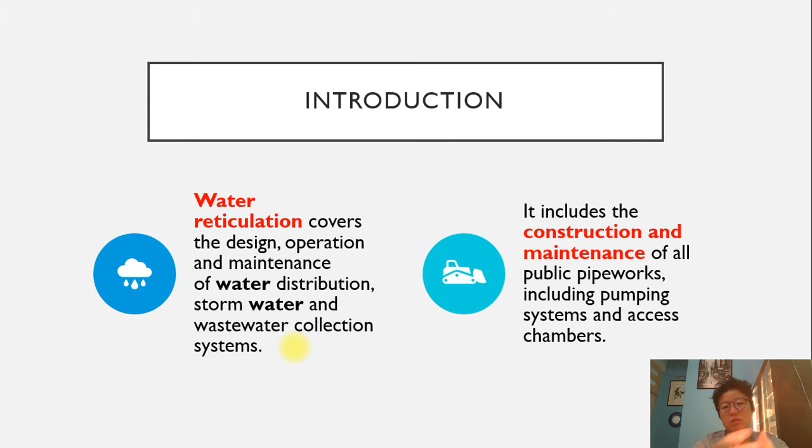Okay, for introduction, you can see here that when we talk about water reticulation, we talk about the design, operation and maintenance of water distribution, stormwater and wastewater collection system. So it's a big system. However, in this chapter, we are going to focus just on raw water coming in from the river, going through the treatment, and then going out, being distributed to all the users, end users like you, me, the industries and all.

Alright, and water reticulation works will include the construction and maintenance of all the public pipeworks, pumping systems and access chambers. Right? So hopefully after today's lecture we'll come to see water reticulation more clearly, and when we start seeing some pipes or what we call menara air around in our housing area, we'll be more aware of what they do and why they are being placed there. Okay,

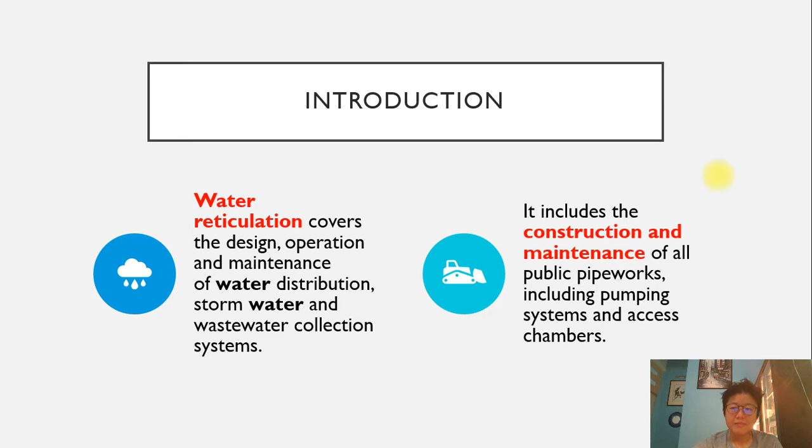as an overview of who are the people taking care of our water supplies, right? What we call the Malaysia Water Authority. It is under KeTTHA actually, Kementerian Tenaga, Teknologi Hijau dan Air, and under this ministry we have what we call SPAN. That's Suruhanjaya Perkhidmatan Air Negara. You must have come across this term before. Okay, and before we go any further from there, let's look at the left hand side of this

flowchart. You can see that there's a Ministry of Finance. All ministries work the same, even for the Ministry of Higher Education, Ministry of Education, Ministry of Transportation. The Ministry of Finance is always on the side providing the funds for running all the operations. Coming down from Ministry of Finance, we have Pengurusan Aset Air Berhad to oversee all the other water authorities in different states in the country.

Okay, now let's go through again. And we have WSIA 2006. This is a body that's been set up, I can read in the legend down here, to provide the legal framework required for the regulation of water and sewerage services industry. Okay, and coming down there, we have SPAN's representatives that oversee the water supply services and sewerage services. So sewage is obviously under IWK. We won't be looking at this. I believe you've already seen this in your earlier chapters.

So for the water supplies, you'll be familiar with these companies. I'm sure if you are from Johor, we know it's SAJ. If you're Malacca, you call SAMB. Negeri Sembilan is called SAINS, and so on and so forth. Right? And Selangor obviously is SYABAS. Sometimes a bit contradictory there because of the water shortage and so on and so forth. Right, so now you know who these companies are answering to. Right? At the end of it is the Ministry KeTTHA.

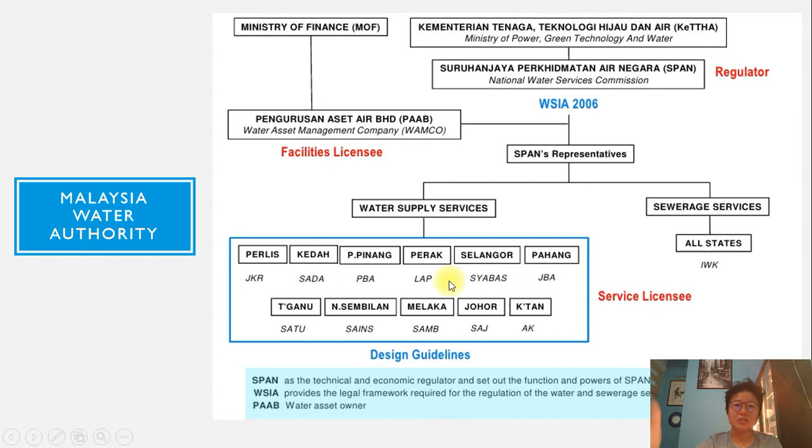Okay, now let's look at the typical water supply system that we have. What we know is that at the end of it, we are here, we are the consumers. We know we turn on the tap, the water will come gushing out. When there's no water coming out, then we know that maybe if it's in Johor, SAJ, Malacca, SAMB, the water truck will come to distribute water. And before that happens, usually we have notices being dropped in our mailbox and things like that. But if it's a sudden cut of water, then it could be a burst pipe because of construction nearby.

And it could be like many years ago, because of some contamination inadvertently found in the reservoir of Durian Tunggal, Malacca, and so the water needed to be drained out and recycled. Hence we had weeks without water. Okay, but typically this is how they look like. At the very beginning, we will have what we call water catchment area. Alright, I believe you learned about this in detail in your hydrology class. We call it water catchment. Essentially, we look at the topographical map.

We look at the highest point, and usually it's a place that has pristine high grounds of foliage. Foliage means you have plants and all. So we are talking about the forest. Okay, why the forest? Obviously, you cannot have bare grounds and hope them to soak up a lot of rainwater. You want the trees to be there to help trap more water because of the roots and all. Alright, and usually, I repeat, it's on higher ground. So that is what we call the water catchment area.

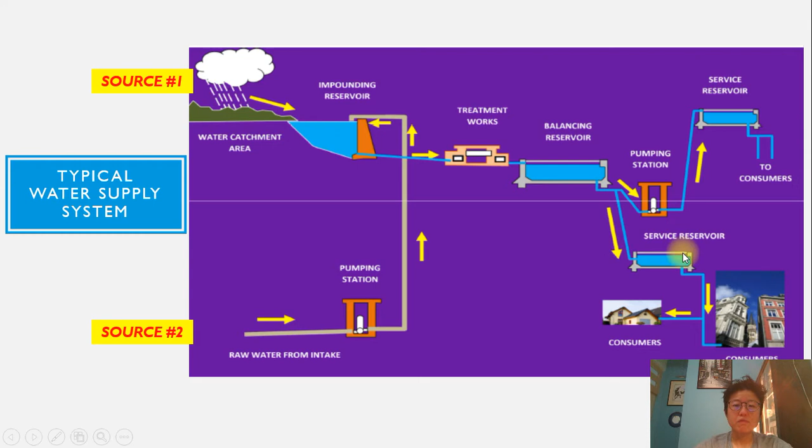So either way, you can see we are having a storage system, a service reservoir, before water is distributed to the end users. Okay, in general, this is how they look like.

And this is a hydrological cycle, just a quick recap of what you learned in hydrology. All our raw water comes from where? Starting from the oceans, the rivers, streams, we have the sun shining bright during the day, then you have evaporation. So it says here that the ocean will contribute 80% of total water vapor in the air. And this water vapor will go up because they are light and energized. When it goes up there, it reaches a lower temperature, it will condense and become what we call the clouds.

And these clouds will get together and become heavier and heavier, and the wind will bring them inland. And when they are too heavy, they will come down as precipitation. When they reach the ground, we call them surface runoff, and in the higher grounds, the cold places, they remain as snow. In the ocean, in the Arctic and the colder places in the Nordic countries, you have icebergs.

And they fall back onto Earth, and are captured in the mountains, come down through the streams and rivers to the lakes. It could be in the groundwater as well, and eventually they all go back to the rivers and the oceans. So this is how the cycle works.

And you probably notice that there's a small label here, the saltwater intrusion. Just a quick one about it, it has nothing to do with this chapter, water reticulation. Saltwater intrusion is apparently quite a problem now everywhere, including in Malaysia. Some blame it on the seawater rising due to climate change.

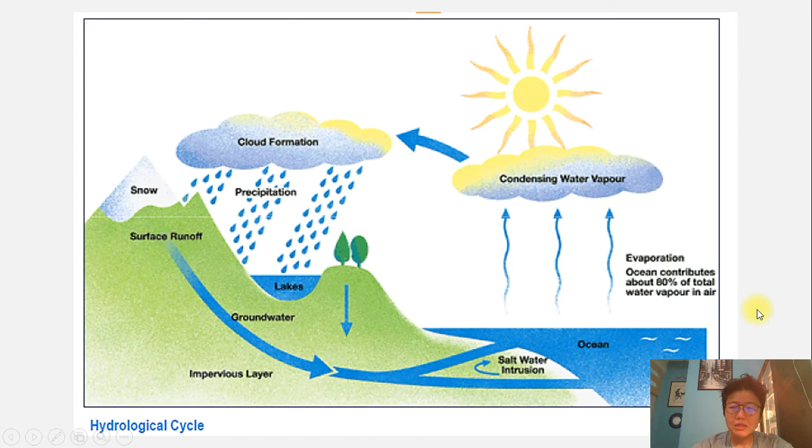Okay. And now we look at the bigger picture, right? Recall we talked about how water is recycled, the hydrological cycle, and how the water is taken from the catchment area to be contained in a reservoir, processed, and then sent out for our usage.

But we also see here that it's true that we have a lot of development on the lower grounds, and we also learned in history that human civilization will always centralize in places where there is a river delta, right? Because when there's a river slowing down, you have much more fertile land, and when your river is slowing down, coming to the ports, coming to the river mouth and all, then you could have ports and so on. So it actually encourages all the economic activities like agriculture and commerce.

So what happens when you have a lot of economic activities going on? Yes, people will start staying around there, and that is why 90% or more of the world population is concentrated along the coastal area. And because there's not much land left around there to be developed, or it has become too pricey, people start to move inland, and you start to have houses that are away from the sea, and probably in places that are not so nice anymore.

If you recall, we learned in soil mechanics, we start to go into places where the grounds are actually no good at all to build anything. If you want to build anything, you need to do what? Ground improvement, and incur a lot more cost, right, to make the grounds habitable. In other words, making the ground strong enough to sustain whatever load you want to put on it, whether it's a building, a bridge, or other infrastructure like roads and rail tracks and so on and so forth. So that is what happens similarly in our water intake.

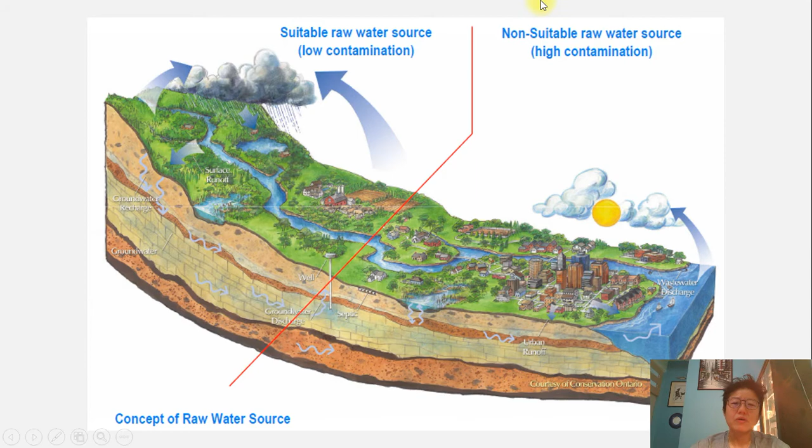That's how it goes. So it wouldn't overburden your water treatment plant, and if you overburden the treatment plant, then you need more maintenance, and you need more alum and so on to treat the water, then the cost will go up. So when the water comes to us as consumers, the rates will be much higher, and then we'll make a lot of noise about it. We don't like it. Alright, so that's why the authority needs to find a lot of balance. Right, it's a balancing act in getting this clean water to our houses.

Okay. Now we look at the water supply facilities as addressed by a Uniform Technical Guideline (UTG). Apparently, this is a standard method of doing things. So very quickly, you have a raw water intake and the pump station. Right, you pump it into your water treatment plant. Once it's done, they'll send it out to the balancing cistern or the balancing reservoir, and from there you can send it out to wherever you need to use. Alright, and usually it's to places where human beings are.

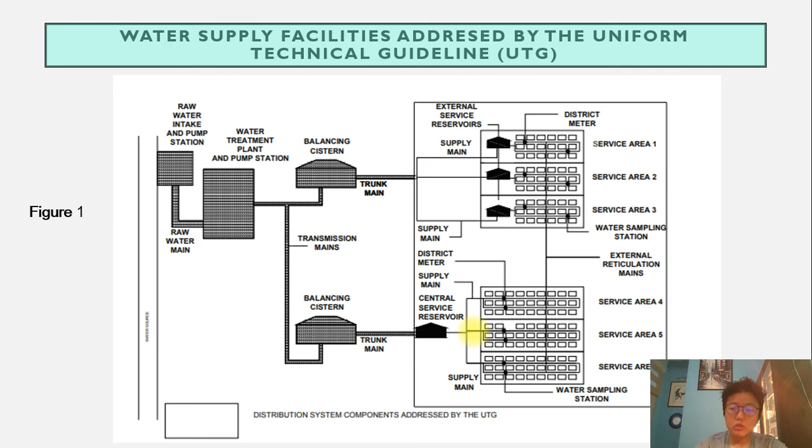Okay, in this situation, you can see they send to this service area, and see that they have external service reservoirs before they start sending it out through the district meter into the individual service area. Similarly here. Okay, so this is a general picture of how they look. We'll go later on into more detail, right, on these distribution systems. And in this layout, they give you an idea of how water reticulation is being implemented in a developed area.

Okay, you can see these little points here. They are actually valves to ensure that, for instance, this area, this is a street, right, coming in, and these are all houses. On the opposite side is Taman Perumahan. Okay, and the water pipe cannot be allowed to just go around and around the taman without any stoppage. So these are little valves that we could put in to make sure that if there's any problem around this area, we could close this and this valve, then this area is cordoned off.

So water supply to this area is still maintained, while this area is stopped for the time being, so that services or maintenance work or repair work can be done. Okay, this is what happens. And now if you go out into your taman and start looking around, you'll probably start noticing places where you have this little concrete block set up there, and they put there, if it's in Johor, SAJ, and there's a symbol of two triangles, alright, two triangles joined together and two little sticks coming out.

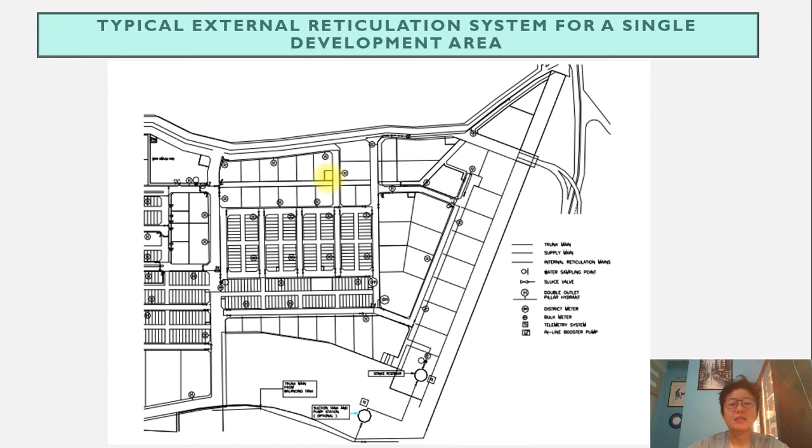That is a valve there. So when the maintenance guys come in, they will look for these indicators before they use the tools to hook up whatever cover and deal with the valves there. Alright, so this is how they look like.

Okay, now how do we supply water to multi-rise buildings like apartments, flats, condominiums? Right, this is probably a lot more in the KL area, Klang Valley, than in a small town like Batu Pahat. Okay, and also because our ground conditions do not quite permit that. Okay, so we have this external reticulation, the main, so there's a main pipe coming through, and you tap it from there. Communication pipe comes in.

This is your property line. Okay, going in here, this is all private property area, and there's a bulk meter here. There's always a meter to monitor the water coming in from the main, and it comes in here. Yes, because it's a high-rise building, usually we have other services around, like swimming pool, general watering for your landscape and things like that, cleansing activities. So it has this channel coming out here for that purpose, and the rest of the water will go where?

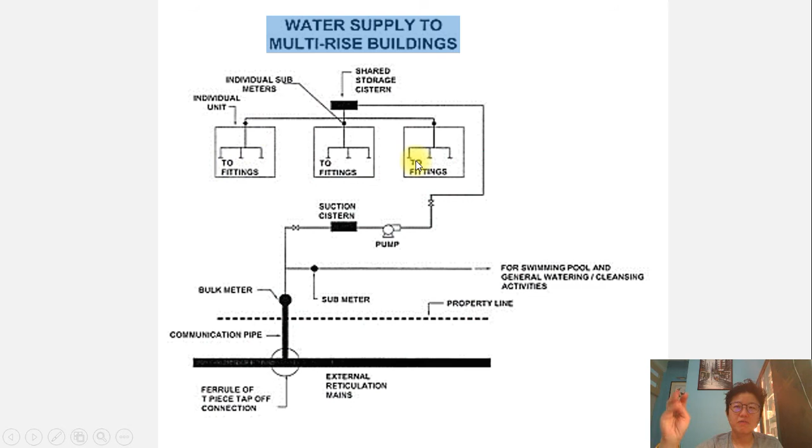Into your suction cistern, a pump, and it goes up to the block, say one block of 30 stories, it goes up there, and there's a shared storage cistern, okay, a shared tank basically, and that is being sent down to individual units. So if your house is at level 30 or level 10, level 11, it doesn't matter, the water will come down from the top to you. And in the individual units, you have all the different fittings in there, whether the fittings are in the toilet, in the shower, in the kitchen, it comes down like this.

Can you see? So in other words, for a high-rise building, flat, condo, apartment, as I said earlier on, you wouldn't have water coming in direct from the main. Okay, it always gets pumped up to your storage tank at the top of the building, and then it comes down again. So if the tank is empty, you have a problem.

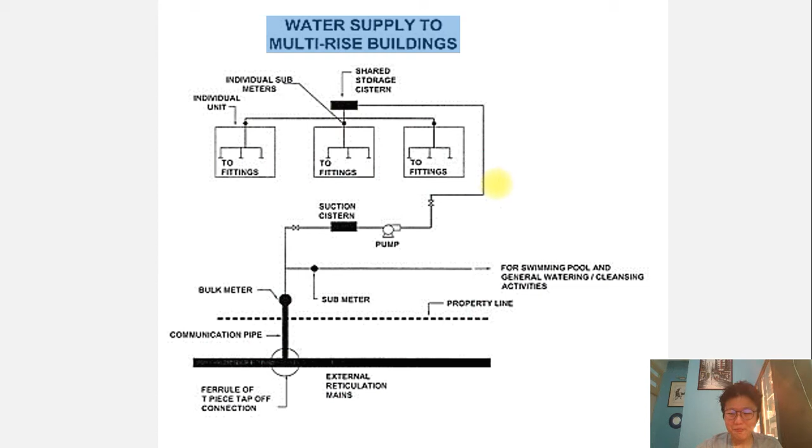Okay. What about sending water to ordinary landed property? So similarly here, you can see you tap from the reticulation mains, come through a water meter, coming through your property line. This is your private area now, Taman Perumahan for example. It goes right in. Where does it go? Individual cistern tank. So in every house you have their own water tank up there. Some people have two, and then it gets sent down to all your different fittings. Alright. Later on we'll see in more detail.

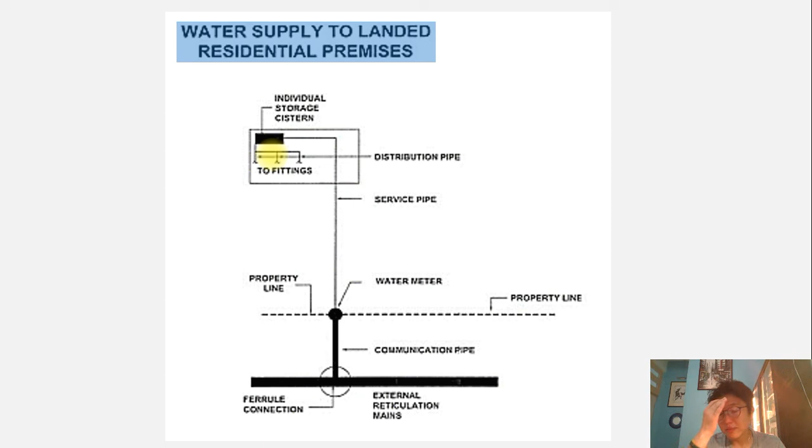For a landed property on the ground, not all water supply comes down from your water tank. Some actually comes through the main. Yeah, you guessed correctly. Water is always gushing happily if you turn on the kitchen tap. You are right, that's the one. Alright, usually it comes through from the back of the house into your kitchen. So your question is, why the kitchen? Obviously, the kitchen is a place where we do most of the washing, and that's where most water is required. Okay.

Okay, and here we have 9 factors you've got to bear in mind when we talk about planning water supply systems in a place. Number 1, we are talking about the provisions, minimum standards that are specified in the Water Services Industry (Water Reticulation and Internal Plumbing) Rules 2014. This may be revised over time, so if you are working in this industry, you've got to be alert about the changes in it. Number 2, water distribution licensees, their specific requirements to suit the local environment. This comes down to the local water provider, SAJ, SMP and all.

Number 3, what is the estimated average daily water supply demand? This will take into consideration the expected losses and leakages during your distribution and storage, and also permitted non-metered use, peak daily rates of flow, and so on. There are 2 points that are very interesting here. In order to know how much average water is required for a place, you need to consider not just the number of consumers, number of units, number of people staying, and so on. You need to take into consideration the expected losses and leakages as well. There's a certain percentage attributed to that. So this is, if you like, a safety factor, because all these water service pipes are buried underground.

So if there's a small leakage, you wouldn't be able to detect it until a very long time later, all right? And until probably the leakage becomes more severe, then you start to notice it. If it's a service pipe coming into your house, you start to notice it when you see your bill increasing significantly in the month or several months down the road, and most likely it's because of a leaking pipe, not a burst pipe, a leaking pipe.

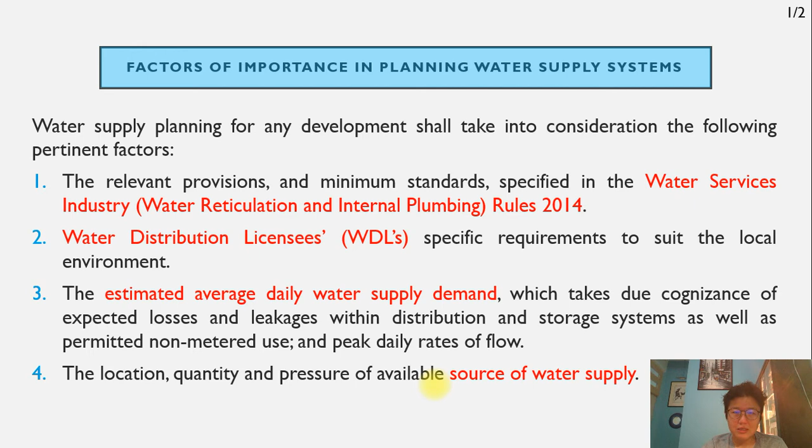Factor number 5 is about the requirement for on-site water service reservoirs and also off-site centralized service reservoirs. In other words, the reservoirs. Number 6, is there a need for your pumping system to send the water out. Number 7, the life cycle cost. All these things can't be expected to function forever without maintenance. So the life cycle costs need to be considered.

Energy efficiency is factor number 8. It's a very important factor to consider. Once you start using pumps, for example, you need energy, or electricity in other words, to run the pump. Otherwise, you're talking about generators. So if you want to run a generator, you either have people keep going into the pump house to pour diesel fuel, or you need to have your own generator to keep it running. And that is still running on electricity from the main coming from TNB and so on. So that has to be considered.

And last but not least, the point is about monitoring and controlling the distribution of the water supply of adequate quality. This is a very sensitive matter, right? People expect when they turn on the tap in their house, the water is safe, the water is not yellowish, the water doesn't have sediment and stuff like that. So the water quality, the safety of things, if you like.

And hence today many homes have their own water treatment systems, whether it's outside the house, like those little rockets to filter the water before coming in, and in the house their own special drinking water treatment system, whether it's Coway, Cuckoo or whatever brand, to make sure that the water they drink is of the highest and safe quality, and sometimes they even provide some health bonus values. I don't know. Okay, so that is a matter of choice.

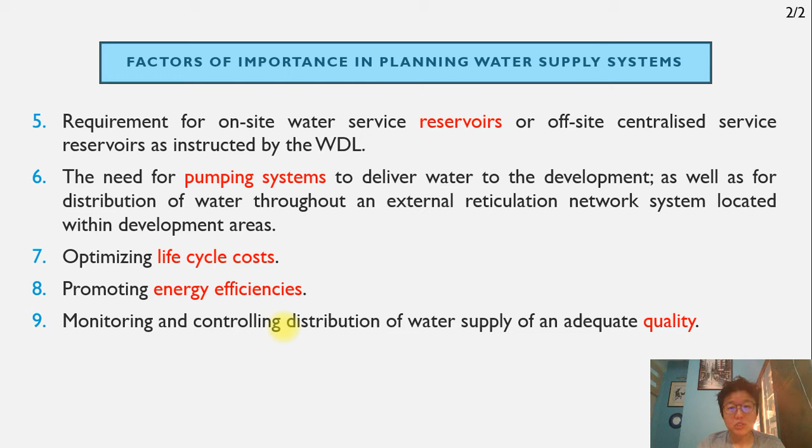All right. And now let's look at how water is taken from the main source for distribution into the area. Water supply distribution systems can be classified into 3 types: the gravity system, the pump system, or a combination of both. And how do we decide on this? It depends on several factors: the topography, the ground conditions, the location, the extent of your distribution area, elevation, and also the site conditions.

So in other words, really it depends on where the developed area is. Is it on the high ground, low ground? Is it difficult to access? Right? If it's too far down, too far away from the main grid, what are you going to do? You've probably got to tap another service pipe into it.

Or if it's too large a development area, mixed development, especially with hospitals, schools are a big one. Then if you tap from the existing main, it may be inadequate because the main is already supplying or servicing other places, as I mentioned earlier on. So these are the factors that you need to consider.

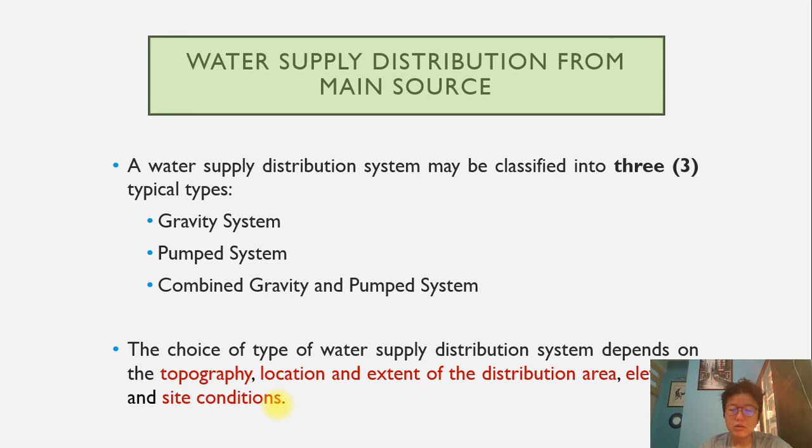Okay. So now let's take a look at what is meant by the gravity system. As the name implies, we're looking at something that is being placed high up, using just gravity, just the height of it, to bring the water down for supply to the users. It is suitable when your source of supply is of sufficient height, most reliable and economical. Water head is available because of the height.

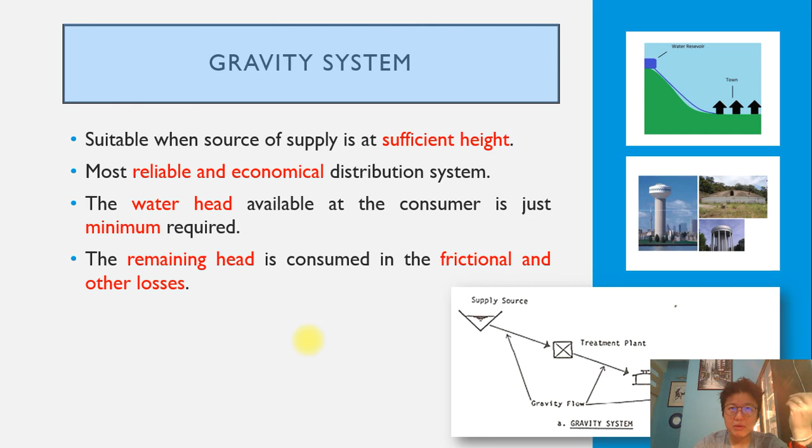Okay, and the remaining head, you must assume that it's being taken up by friction and other losses, because as water gushes down your pipes, surely there is friction and other losses, maybe some leakage, and we know that losses can be due to noise, friction, and so on.

All right. The next one is the pump system. So in this case, your water is being pumped directly into the distribution without any reservoir. There's no storage. See, water supply, treatment. After treatment, you take directly from the treatment plant or from the balancing system, it goes through a pump and goes straight to your residential area, for example. So imagine in this situation, definitely you need a high lift pump, a good, powerful pump.

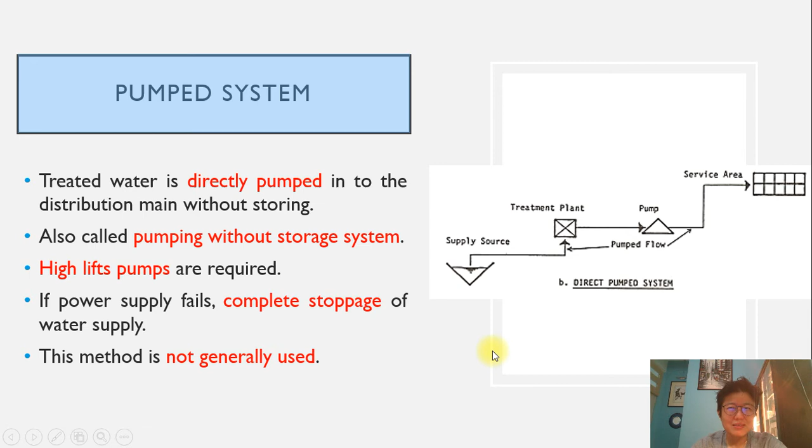There is a catch. If the power supply fails, your pump breaks down, or there is a blackout, then there is no electricity, no power supply, there will be a complete stoppage of water supply, because there's no water coming in from the source, there's no pump that will bring the water in, and hence this method is not particularly favored.

All right. A combined system, this is most common actually, so you get the best of both worlds. What it does is that your treated water is pumped and stored in an elevated distribution reservoir. You still have a reservoir, and then it goes through to your consumer by gravity, obviously. And you also have the excess water during low demand that is stored, but you can get it during high demand. But other times, you use it directly from a pump, from the treatment plant. It pumps right out and goes to your service area. So this is a combined system.

So note here that during low demand, it's like, what is the peak time? Well, probably from 6 in the morning until 8, before people rush off to schools and offices.

Maybe in PKP it's slightly different. Whole day maybe it's peak, I'm not sure, because I'm busy cooking and baking. Let's talk about the normal situation, right?

Not the PKP situation. In the morning, 6 to 8 is peak hour. Everyone is turning on all their taps for showers, cooking, and so on. Some people are watering their plants. So that's a time where the water pressure must be sufficient to provide for everyone. Where's the second peak time? Yeah, in the evening when everyone comes back, probably between 6 p.m. to 8 p.m. That's the time where everybody will start to have their shower, to cook dinner, and so on. So that's a peak time.

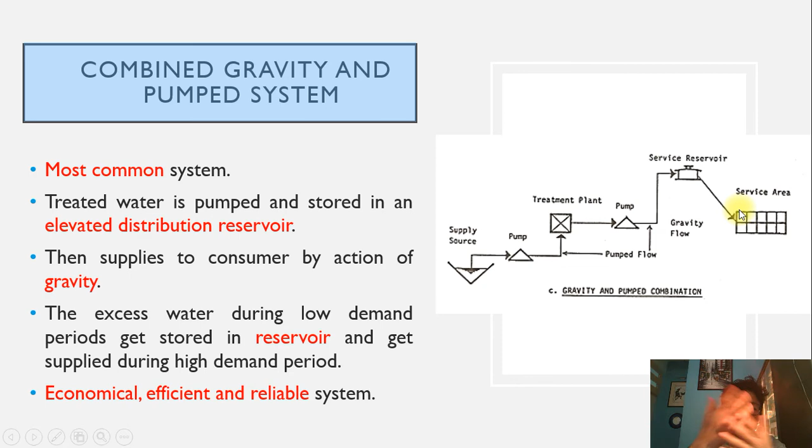But other times in between, it's actually what we call the low demand time. So during the low demand time, that is where the water is being pumped to fill up the reservoir, so that during peak time, the reservoir will be able to provide for the users adequately. So that's how it works. Okay?

Alright, now let's take a look at how water is being supplied into a residential area. I think by now, after the 26 minutes of what we have shared earlier on, you already have a pretty clear idea of how it's done. This is going into a little bit more detail. After the cleaning process of treatment, your water supply system will go through a main pipe system that has several major pipelines, and this main pipeline system will connect to the storage pool or the pumping station, to the communication pipes that will supply water to the building.

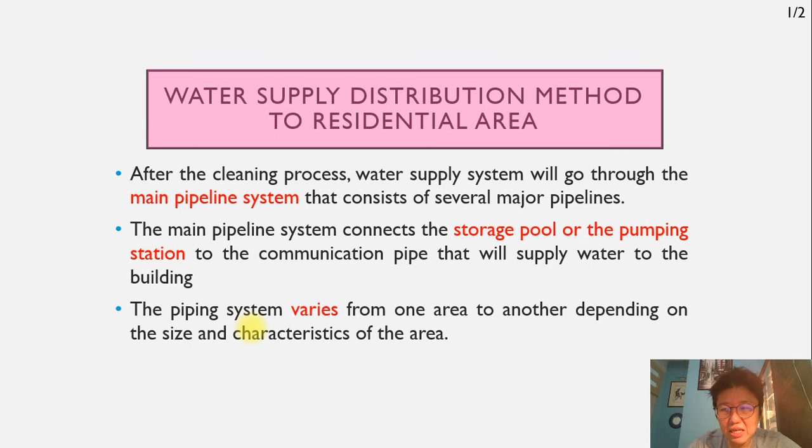Alright, and this piping system varies from one area to another. It depends on the size and characteristic of the area. Okay, and these are the factors you need to consider that can affect your main piping system. Like what? The physical condition of your soil and contour distribution area. If it's hilly, undulating, the pipe goes up, down. When too much up, too little down, then you know it will affect the pressure.

Distance between the distribution area and the main: if it's too far away, it can also reduce the pressure, and its cost of laying a long pipe, and there's always a safety issue of the pipe malfunctioning, a crack, a leak, things like that.

Ability to balance the needs of consumers with the water production, number and types of users. Industry and ordinary residential areas are two different things, right? Hospitals, for example, are different. Recreational areas with big pools, that's different. Ability of water supply during peak demand is very critical, and water loss in terms of friction and other leakages.

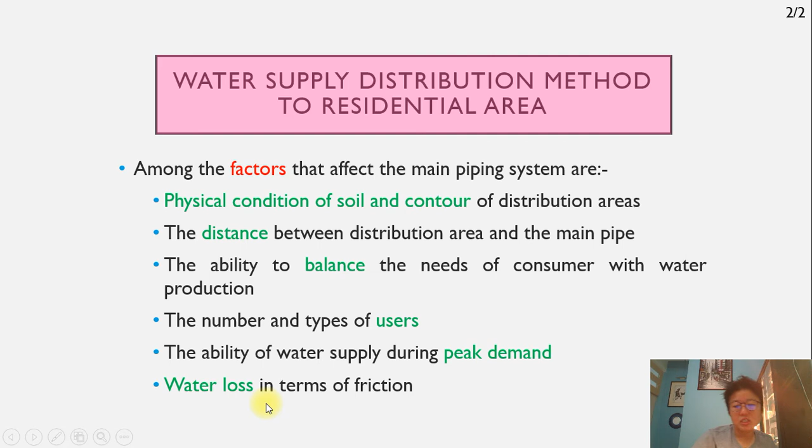When there is a water stoppage, and when the water supply comes back again, there's a valve or a fitting that we need to open. We know which one in the house, so that the air trapped in the pipe can be released and wouldn't block the water from flowing through.

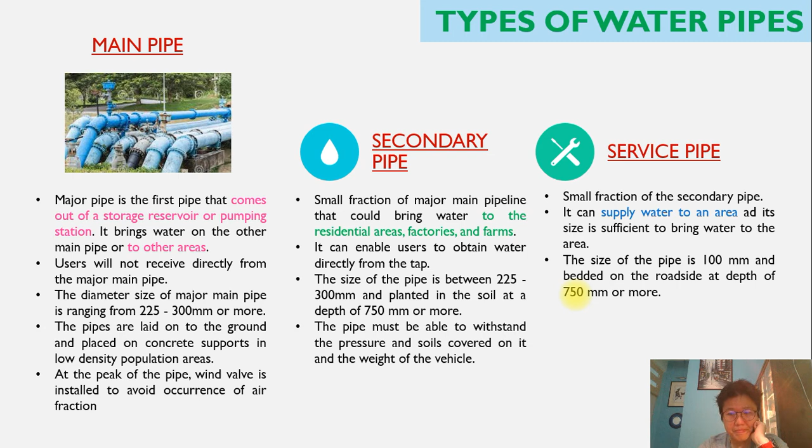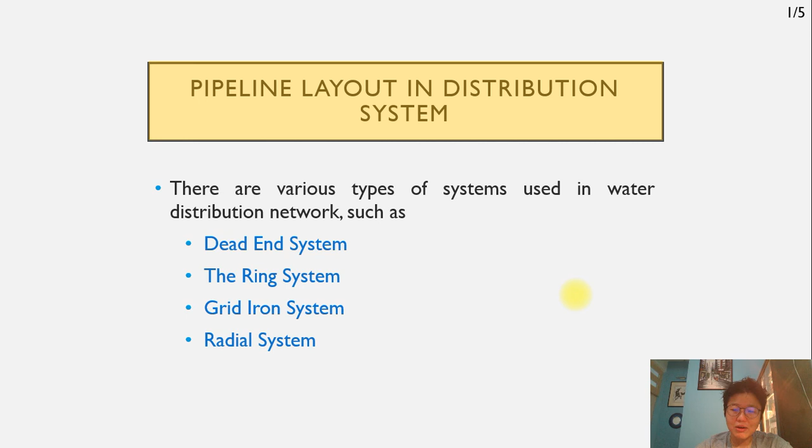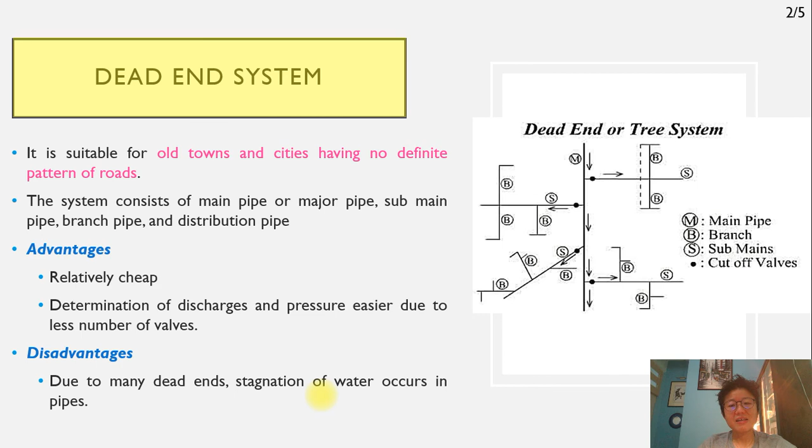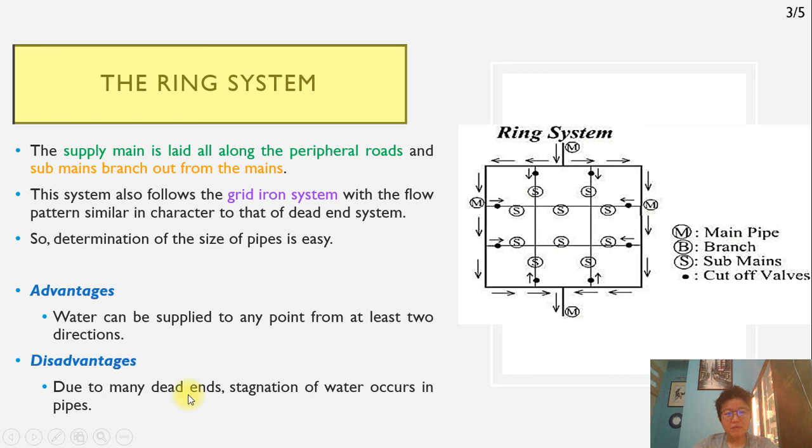And it follows the grid iron system. Later on we'll see the grid iron system. The flow pattern is similar. There are dead ends as well, and it's easy to decide how big the pipes could be. And what are the advantages? You can supply your water to any point in at least 2 directions, because the periphery, the perimeter, has got the main. You want to go to this point, you come in from here, you come in from here. The disadvantage is that again, many dead ends, there could be stagnation of water.

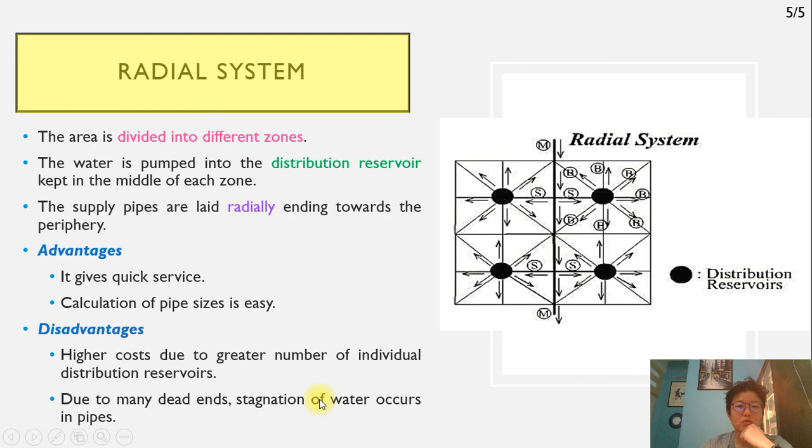Advantages: quick service, and calculation of pipe is easy because water is not coming from the main or your sub-main. It comes from where? It comes from your reservoir. And from one center it comes down to the people, so it's a lot easier to calculate quite accurately. The disadvantage is high cost because of a great number of individual distribution reservoirs, and many dead ends, so stagnation of water could happen as well. So apparently stagnation could happen in all systems except the gridiron system, because the water can come from two directions.